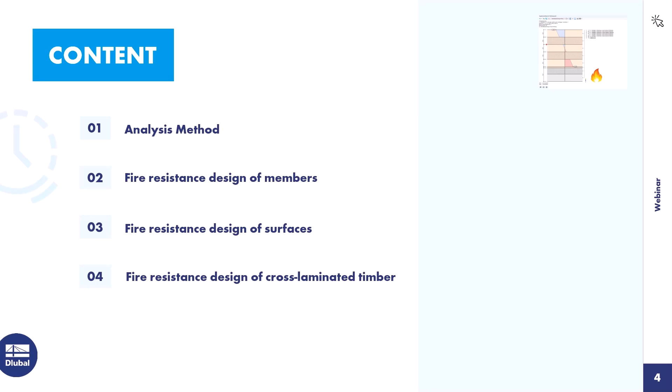We will switch to the program and I will show you the settings directly in the program. But the main focus today is the theory, so that you will understand what is the background of the Eurocode, and how everything works with the charring and with the design afterwards. So we start with theory, then we switch over into the program, we check a few members, we check the design of surfaces, and at the end we will design cross-laminated timber for fire design. Okay.

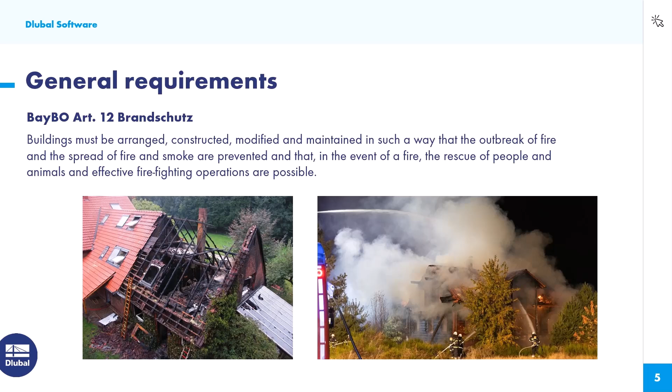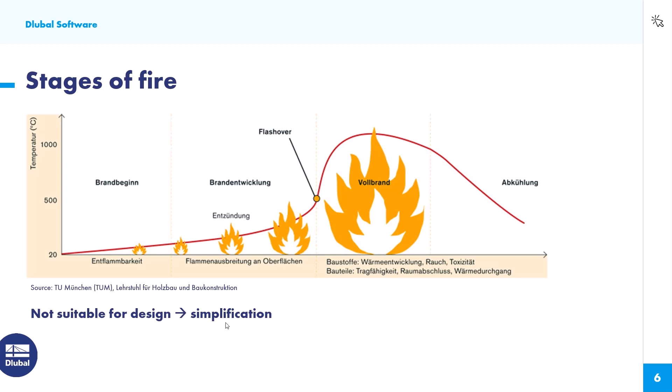Okay, so then we need to talk about stages of fire. The first stage is the non-flaming smoldering before it goes over to the developing fire stage. Then we get the flashover where we receive the fully developed fire before it comes to the decay stage. And of course, when we think about this red curve here, you can imagine that this is hard to simulate in a structural analysis. That's why we need a simplification, and how this simplification looks, you will see in the next slide.

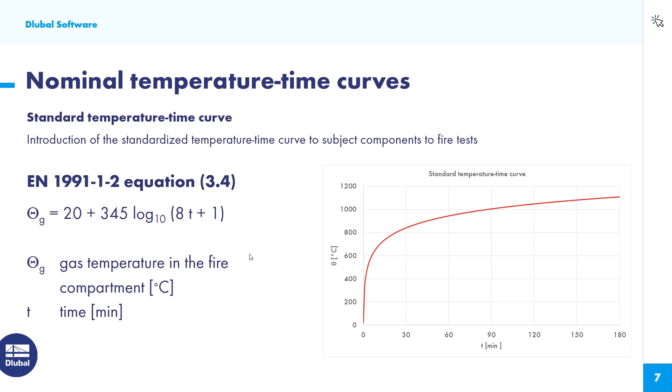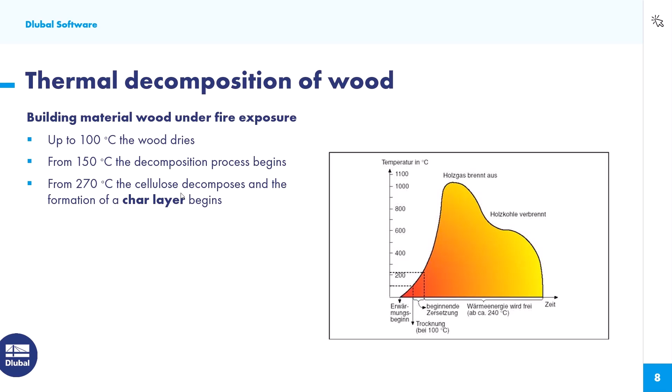Next slide is about thermal decomposition of wood. I guess it's clear to everyone that in the beginning the wood begins to dry. This is up to 100 degrees Celsius. From 150 degrees Celsius, the decomposition process begins. So we are around here. And it has its peak at around 270 degrees Celsius, where the cellulose decomposes and the formation of a char layer begins. And this char layer plays an important role, and it's actually the key for our timber design. That's why it's in bold letters.

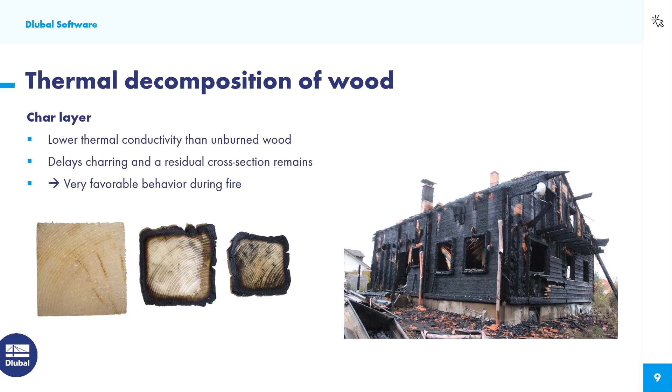In the new Eurocode, this plays a more important role, and we are also focusing on it in the future, but for now we have no integrity. Or we do not prove any integrity, since it is actually not a design check in terms of structural analysis, but as I mentioned, it plays a more important role in the new Eurocode.

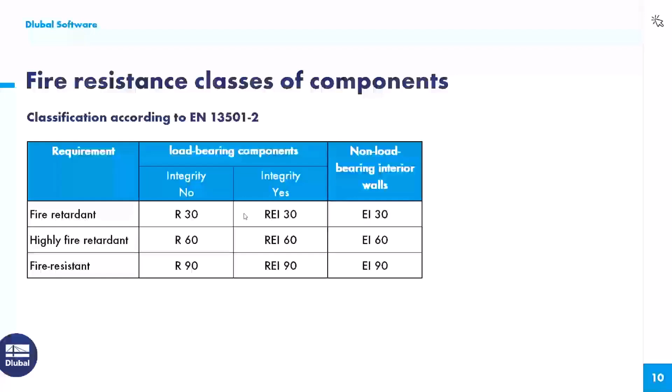Okay, fire retardant, highly fire retardant, fire resistant. I guess that's clear to everyone. We talk about R30, R60, R90, R120, and so on. The indexes here are described on the next slides. I don't want to spend much time here. Please check the video afterwards and pause it. You will be able to read it in detail. Today we're focusing only on the load-bearing capacity.

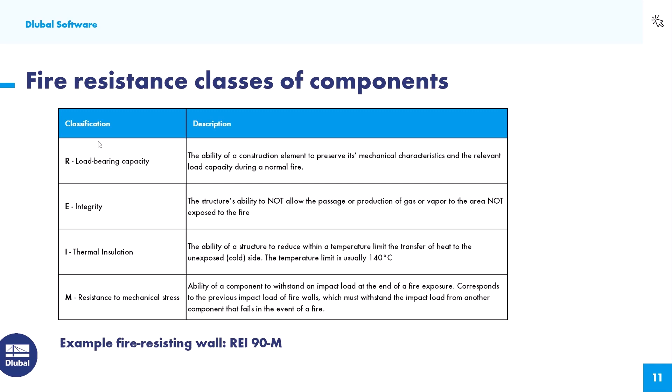Okay, so now let's actually start with the structural analysis part. Combination rules for actions. We need to know which loads we can or have to consider in case of fire design. In this case, we have to look into Eurocode 1, which refers to Eurocode 0, chapter 6.4.3.3. And this is nothing else than the extraordinary design situations.

There's a small error here. Sorry, it should be 'or' and not the German word 'oder'. I'm sorry for that, I forgot to replace it. So it's without any partial safety factors. You see it here, not for the dead load and also not for the variable loads. There's only the question whether you have to use ψ1 or ψ2 for the leading variable action, but this information you should get from the respective national annex of your country.

Okay, there's also this simplification where you use the internal forces or the actions from the normal temperature design multiplied by some factor, and you can design with these internal forces, but I do not recommend using this simplification since it is mostly way too uneconomic. All right.

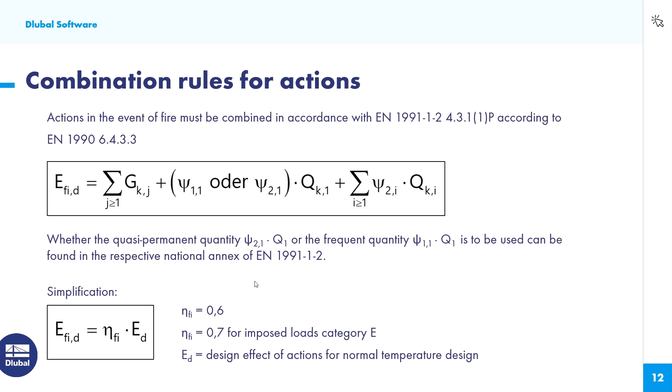The next slide is about strength and stiffness in case of fire. I guess you know these characteristic strengths fk, fmk or fck and so on, ftk. This value is actually the 5% quantile value. In case of fire, we can use the 20% quantile value. That means 20% of the values are lower and 80% of the values are higher than the characteristic values.

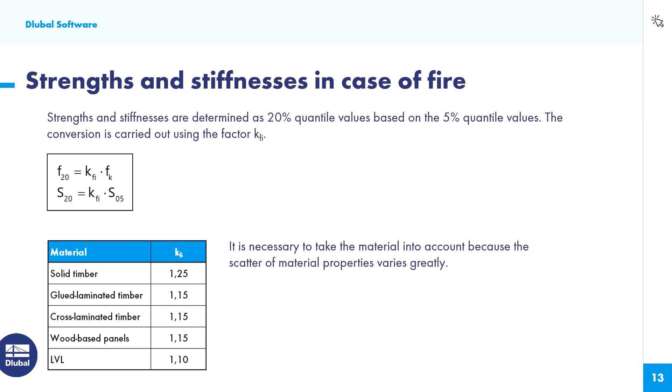Fortunately, there is no additional value in the material standards. They used this conversion factor k_fi, which helps us keep this database as small as possible. And you see the 20% quantile value is dependent on the material. It depends on the scatter of the material properties, because it varies greatly from solid timber to glulam, for example. And I guess it's clear that the properties scatter because of branches, cracks and whatever. Okay, that's it.

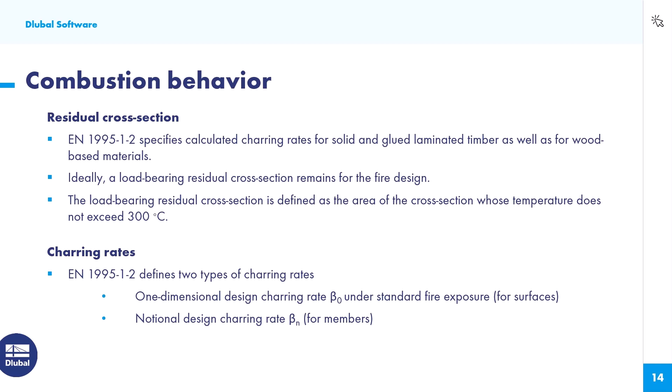Then we need to talk about charring rates. We have two types. We have the one-dimensional charring rate, beta 0, which is used for surfaces in terms of RFEM. And we have the notional design charring rate, beta n, which is actually for members. Let's have a look at table 3.1 according to Eurocode 5. Here you will find the charring rates beta 0 and beta n. For glulam, for example, beta 0 is 0.65 and beta n is 0.7.

All right, the difference here, or actually the ratio, is much higher for solid timber than for glulam. The reason is that solid timber has a much rougher surface, and cracks also play an important role, which is why this ratio is much higher than for glulam. The one-dimensional charring depth can be calculated by multiplying the charring rate by the time. Also for the notional charring rate, we multiply the charring rate beta by the time.

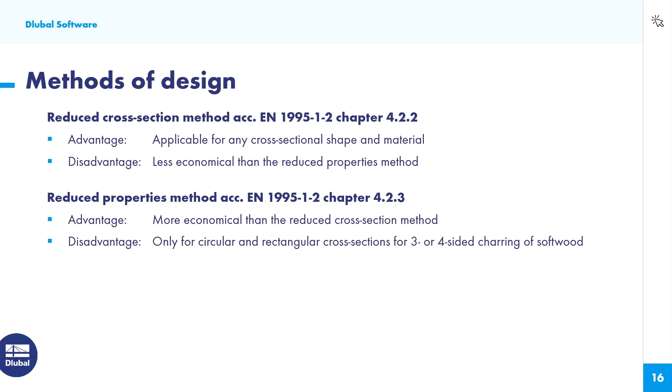softwood as well. Actually, the reduced section method can be used only when we talk about surface design. For example, for CLT, the reduced section method needs to be used. In our program, we consider only the reduced cross-section method, but maybe in the future I'm thinking about also introducing the reduced properties method, since the amount of work is not so high. So I'm thinking about also taking over the reduced properties method for the member design.

Okay, let's have a detailed look at the different design methods. Here we see the reduced cross-section method. We have the initial surface of the member, and it's getting reduced to the residual cross-section by the charring rate multiplied by the time. And since the area between the blue and the yellow line here also has an increased temperature already, and therefore a reduced strength and reduced stiffness, this area should also be neglected.

And that's why, for times higher than 20 minutes, the factor k0 is 1 and d0 is 7 millimeters. So additionally we add 7 millimeters to our charring depth. When we go to the strengths, we have a kmod,fi factor, but do not interchange it with the kmod factor from the cold state design, where we have the kmod factor dependent on the load duration class.

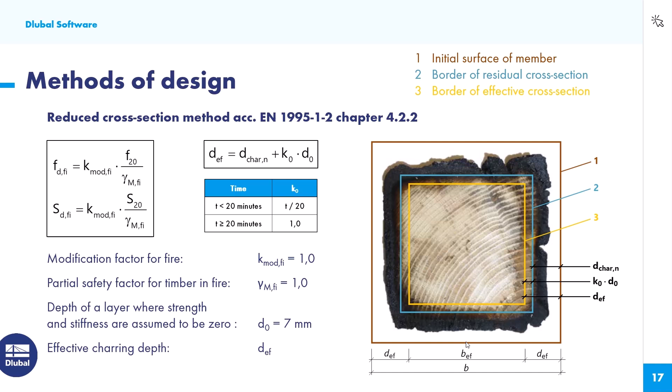The reduced properties method is actually similar. We have the initial surface of the member and the border of the residual cross-section. What we don't have is this additional 7 millimeters, so the yellow line here. That means the effective depth is the charring depth. But we have to consider a kmod factor which is smaller than 1.0. This kmod factor depends on the perimeter of the fire-exposed residual cross-section and the area, and it differs for bending, compression, and tension strengths.

And that's why it maybe makes it a bit harder for us, since we always have to fulfill the global design for all design checks. There is nothing listed for shear, and nothing listed for compression perpendicular to the grain. So maybe we need to find a solution to also introduce this reduced properties method, and I already have ideas for it.

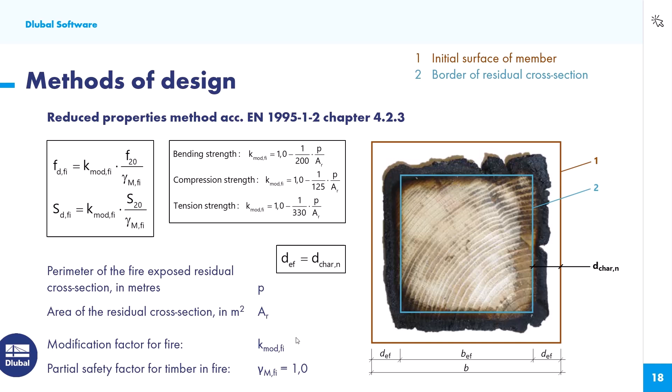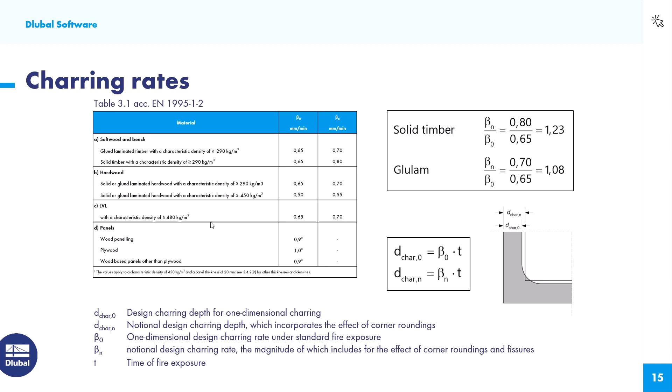Okay, let's do a small example for this ceiling beam, which is softwood C24, 140 by 240 millimeters. The fire resistance period should be R30, and the charring should be on 3 sides: left, right, and the bottom side. So we calculate our charring depth, multiplying the beta n factor from table 3.1. It's this table: solid timber, which is C24, we have 0.8, multiplied by the time. In this case it's R30, meaning 30 minutes.

We get 24 millimeters, and we additionally add 1.0 times 7 millimeters. Then we get an effective charring depth of 31 millimeters. Now we take the 31 millimeters 2 times and reduce the width, and we get 78 millimeters. For the height, 240 millimeters minus 1 times 31 millimeters equals 209 millimeters. Actually, it's really simple. Okay, then let's switch over to RFEM.

I'm sorry, maybe I should... I'm sorry. I have loaded the wrong files.

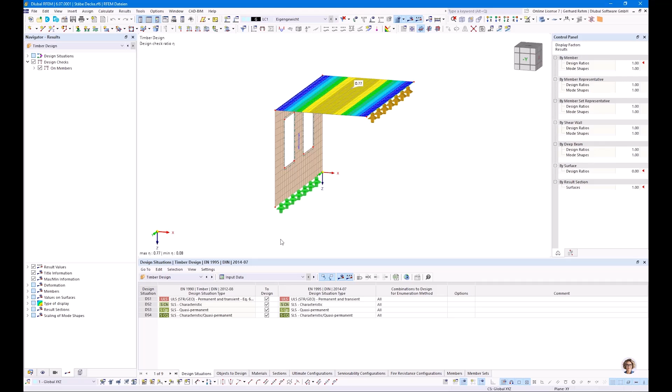Because they were already finished, and of course I want to start directly when our ULS and SLS design is fulfilled. So we see this floor here. I have shown this floor with different variants in another webinar, I guess a year ago or something. You will find this webinar also on our website. And now, of course, I want to extend it for fire design.

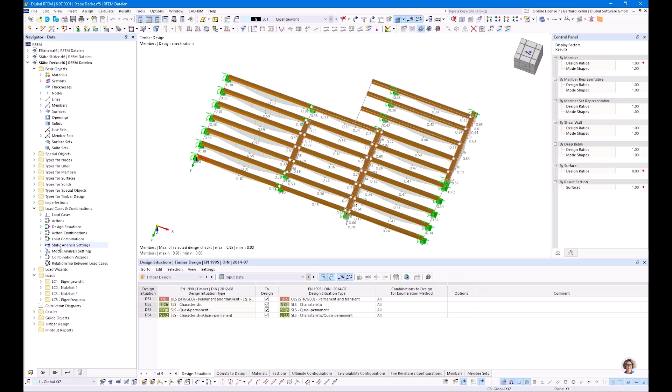And what we will do is we will add an additional design situation, because we need our actions in case of fire. Okay, so I added the design situations here, and I will add another design situation. In this case, I select accidental fire. Watch out, there is also accidental without fire, but this should be used for example for an impact load or something. In case of fire, please use this one here. It depends on the national annex. Since we have only imposed loads and I use the German annex, I will use psi 2 in this case.

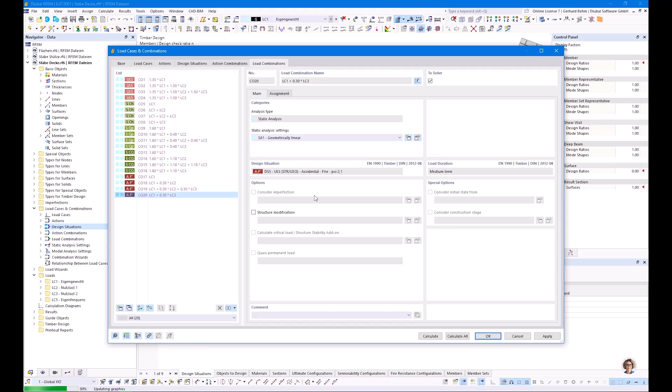Okay, and then we get our load combinations for ULS, cold state, and also the fire state, where we have imposed loads, dead load, and imposed loads on different spans. Of course, timber design results need to be deleted. We want to add fire design here. All right, let's have a look at the floor beams. In this case, fire resistance config was automatically assigned to it. So in case you don't receive any results for fire design, please check if a fire resistance configuration was defined here. Let's have a look at it.

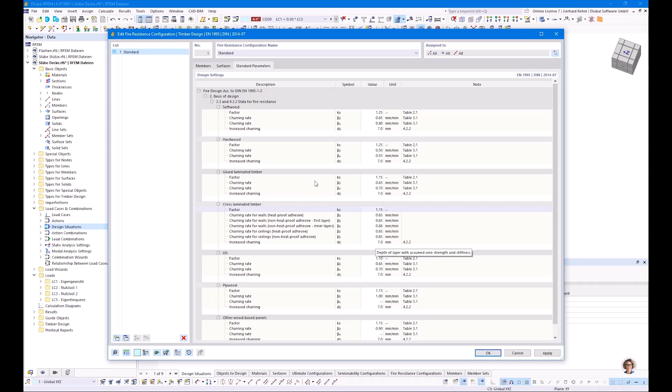Okay, so there are different tabs for members, surfaces, and some standard parameters. So in this case, it's exposed to fire on 3 sides, so not the top side. And we check it against 30 minutes. And when we switch to standard parameters, you will see all these beta factors for different wood and for different timber material. And you are able to change these values in case of some special settings from some special approval or something. Okay, so that's actually it.

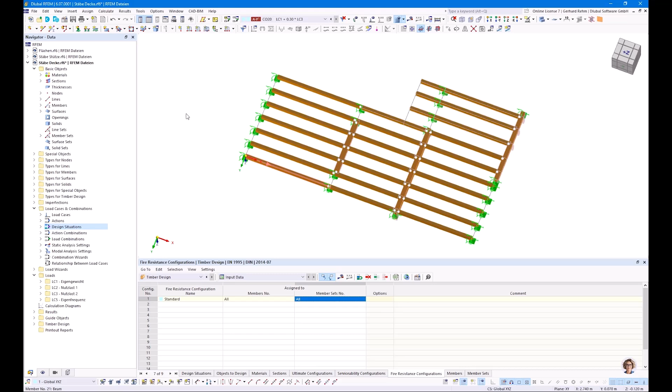So here we can also check which fire resistance config is assigned. So in this case, this config 1 is assigned to all members and all member sets. Of course, if some member has a different setting, you can simply switch it here in this design configuration tab. And here you can also create new configs. Okay, so that's it. I guess for now I will run the analysis.

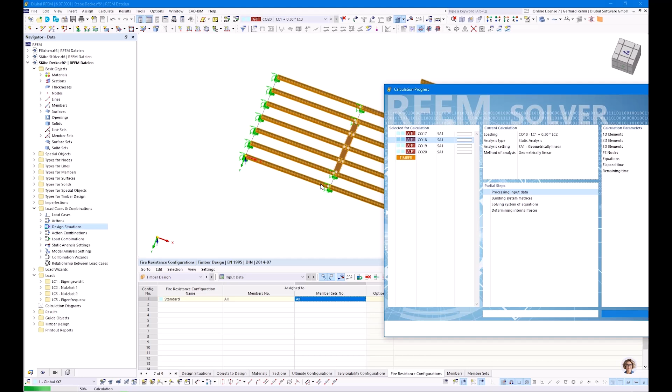And then we will check and compare, because the floor beams here, the ceiling beams, have exactly the same section like my hand calculation. So we had 140 by 240 millimeters. Okay, so let's focus on, it does not matter. We don't take care of the numbers for this example. Let's check this member here, and we check fire resistance. Let's check bending. And let's have a look at it. So it's not so interesting.

We only see how the characteristic value is transferred into the 20% quantile value. So we increase the characteristic strength by factor 1.25. So it's okay. And k mod fire is 1.0, and also the partial safety factor for fire is 1.0. Here we get the information about the fire resistance.

So we have a t required of 30 minutes, and we have beta n of 0.8 millimeters per minute for this material, multiplied by 30 minutes equals 24 millimeters. We add additionally the 7 millimeters, and we get an effective charring depth of 31 millimeters and an effective section of 78 by 209 millimeters, which was exactly the same value as in our example here. Okay.

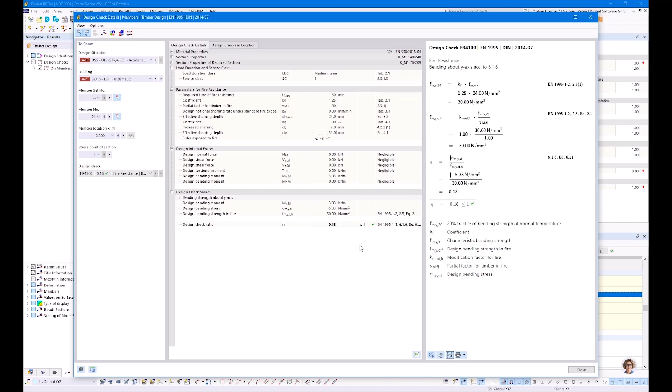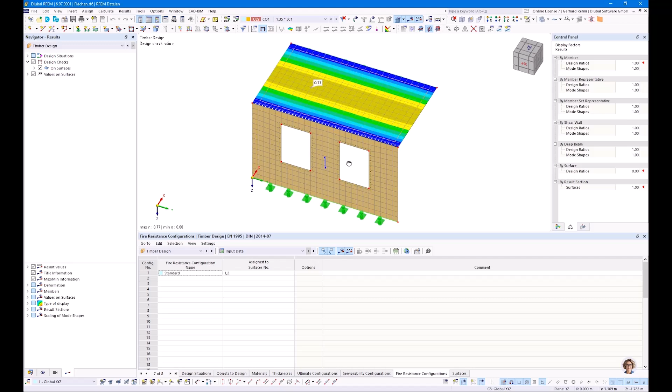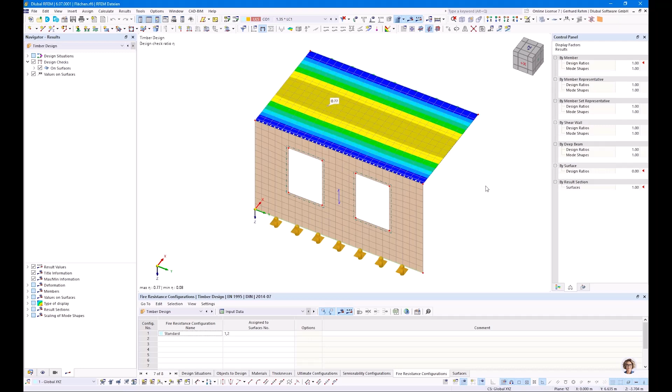Let's go directly to the next example. It was this one with surfaces. So there's a small additional building next to another building, but the other building was not modeled. So that's why I have this fixed support here on this side. There is a line hinge here on this side, and there is a support here on the wall on the bottom side. So this floor here was made of an 80 millimeter glulam floor.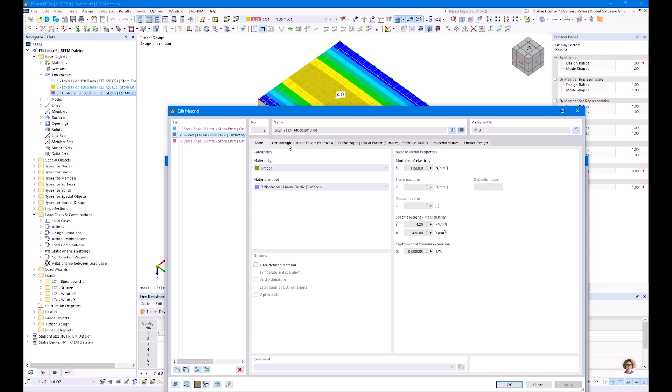So it's an orthotropic material model. So let's have a quick look at it. So I've switched to orthotropic linear elastic surfaces, where we have a different modulus in X and Y direction. Of course, this is made of multiple pieces of glulam. So maybe 80 by 625 millimeters or 620 millimeters or something.

And of course, there should be no moment transfer in Y direction of the surface, but since we span it directly in one direction, there is no big difference. Of course, if there is another support here, then maybe we should think about reducing the stiffness in Y direction or adding some line hinges, but for this example, it's absolutely okay.

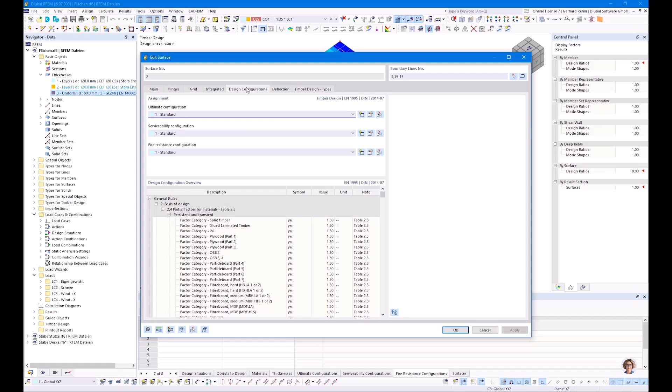Okay, so what I have done here was I have defined some fire config for surfaces. So we check it. Let's check it against 90 minutes. To make an extreme example, you can imagine we have 80 millimeters and we expose it to fire for 90 minutes. Yeah, you can imagine what happens. And we want to have the fire only exposed on the bottom side. So that's all what we enter for now. We come to all other settings later.

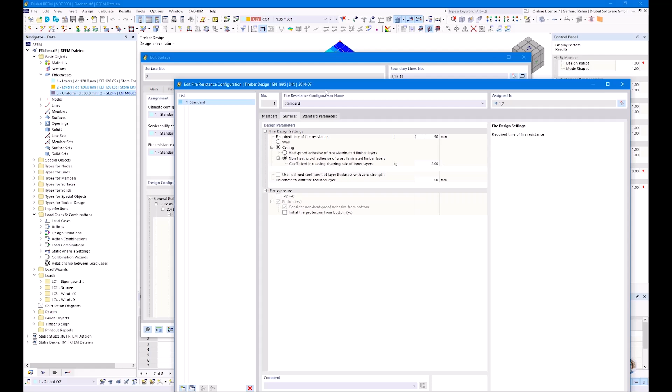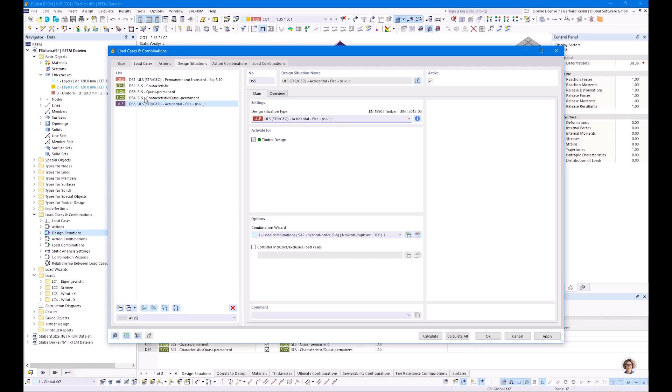Okay. So we need also this design situation. I will add a new one here. So in this case, I select this one because wind is also considered here. So we have dead load, we have snow load and wind load, and we have a really high dead load because I have defined 2.5 kilonewton for load case 1 in this example.

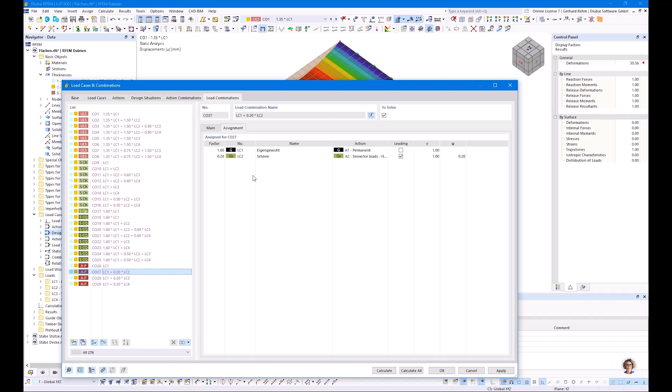Okay, let's check it. Yeah, we have load case 1, load case 2, which is snow, load case 3, which is wind, and load case 4, which is also wind. As I mentioned, for the German annex this load combination can be neglected, but for now I'll leave it. Okay, so that's actually all.

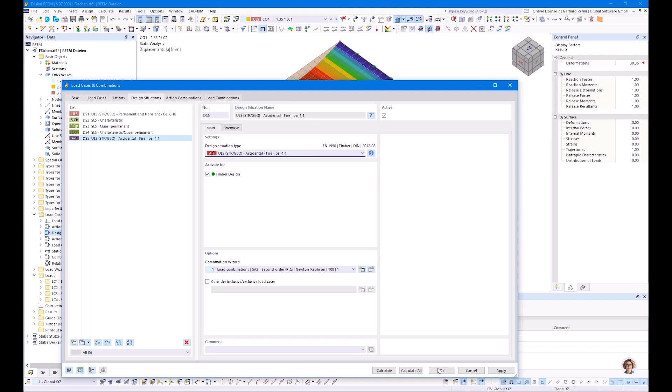Oh, sorry, I forgot to create it. A minute. I hit the cancel button and not the OK button. That's why it was not saved. Yeah, let's use the first one. Okay, that's actually all. We focus only on the floor for now. I start the analysis. And then let's check what happens.

So maybe have a focus on this diagram here. You see already the deformation becomes extremely high. So we are around 1.30 meters, 1.40 meters deformation. And you see there are some errors, but fortunately we get some results.

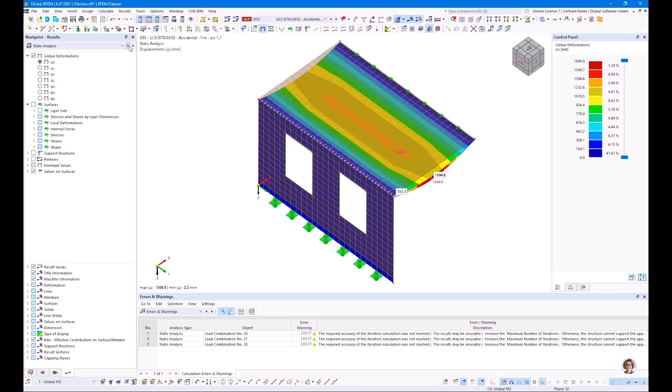But of course, when we check the deformation for this load case, the maximum deformation is 1.70 meters. The span of the floor is only 3 meters, so it's 50% of the span length. And I guess it's clear that no firefighter will enter this room when he sees the floor deform like this. But at least we get results. But watch out, it can happen when you don't take care of it.

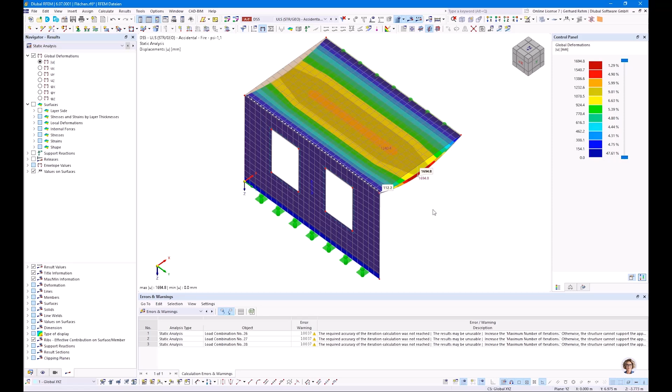Of course, nobody would apply 90 minutes to an 80 millimeter panel. So it can happen that the structure becomes unstable, especially when we talk about p-delta analysis, so second order effects. Then, of course, the critical load factor plays an important role, and the structure becomes unstable under some circumstances. This needs to be considered. Okay, so in this case, it's clear this floor will definitely not work.

And when we check the ratios here, you see directly the ratio is extremely high. Let's check it directly. We have the charring depth calculated here, and the remaining thickness of the surface is 14.5 millimeters. You can enter and see each intermediate value here in this dialog.

But there's also this diagram here on top, or when you close it and click here, let's switch to the stresses, you will see we had the 80 millimeter and the remaining effective thickness is only 14.5 millimeters, which is of course too low. And the charring depth here can be seen as 65.5 millimeters.

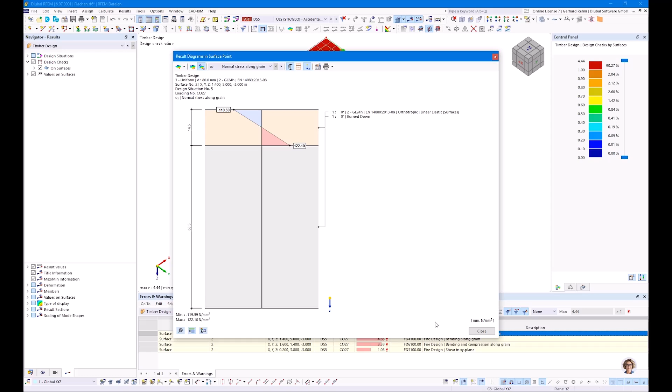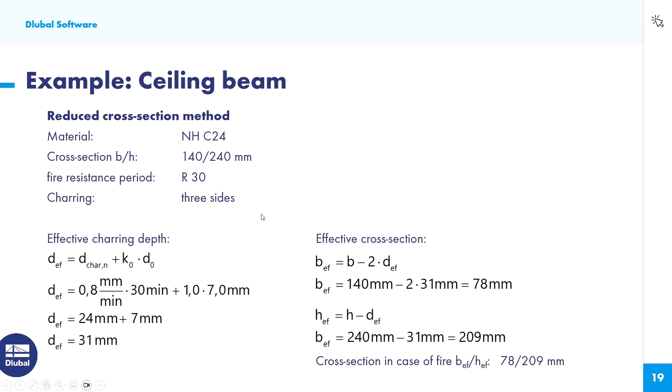And now the question is how we can fix this. Of course, we can increase the thickness of the surface, but there is another way we can consider. So let's go back to our PowerPoint. And now we talk about initially protected components. As you can see, I guess the most common case is to cover it by some gypsum boards.

The advantage in this case is we save time, because the gypsum boards, or all other claddings, cause a delay. So the timber will start to burn much later than without this cladding. Of course, it always depends on whether the timber should be visible or not, that's clear. But in case it's not visible, then we can apply such claddings.

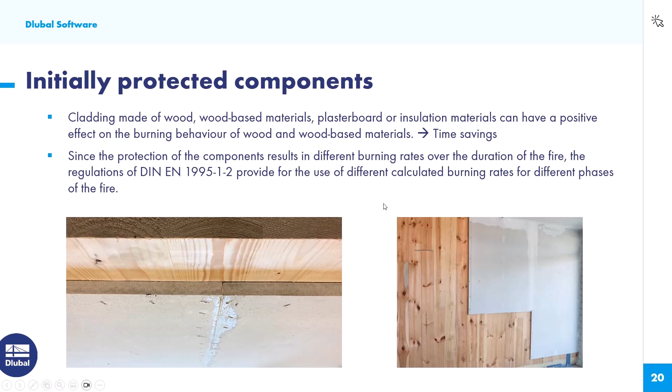The Eurocode describes different stages or phases of fire, and we will have a look at it in detail now. Maybe you have seen similar diagrams like this. Curve 1 is the charring rate for the unprotected surface. So we have a linear charring rate; actually here that's the charring depth. It's nothing else than beta 0 multiplied by the time, and of course it is linear. And the timber starts to burn exactly at t equals 0.

And now we come to this delay, when we use some protection. Here we see two different curves, curve 2 and curve 3. We will talk about both in detail on the next slides. Here the time of the delay of charring due to protection equals the failure time of protection. That means the protection will fall down from the floor, for example, at the same time the fire starts on the timber.

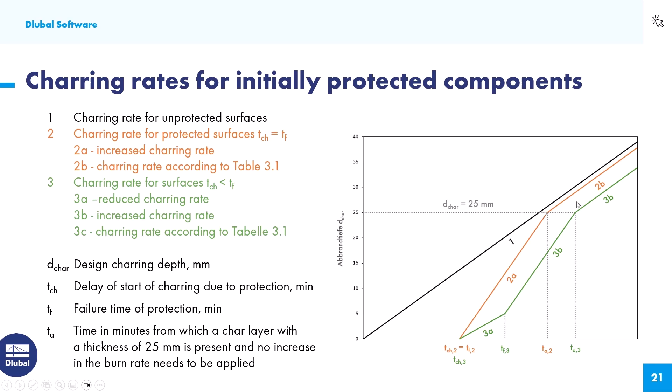And after the protection is gone, we will have some increased charring rate again. You see here we have this 25 millimeters limit, and after this 25 millimeters the normal charring rate will continue. And that's the time TA, and this time is actually the time in minutes from which a char layer with a thickness of 25 millimeters is present, and no increase in the burn rate needs to be applied anymore. Okay, let's have a look on it in detail.

Okay, so for wood-based panels, gypsum plasterboards type A and H, we can use this curve number 2, where the charring equals the failing time of the protection. For wood, it's simple. We can simply divide the panel thickness by the charring rate, and then we know the time. For the, I guess, most common case using gypsum plasterboards, we have equations in the Eurocode for fill joints or gaps smaller than 2 millimeters, or for gaps higher than 2 millimeters.

So for a typical 12.5 millimeter plasterboard, the charring time here is 21 minutes. So the delay, the fire will start 20 minutes later. But as you can see here, we have an increased charring rate afterwards. So at the end, I guess this was, I'm not sure, it was 60 minutes. At the end, with this time, we don't save much time, because here we can consider a linear curve, and here it's bilinear. So we have an increased charring rate here.

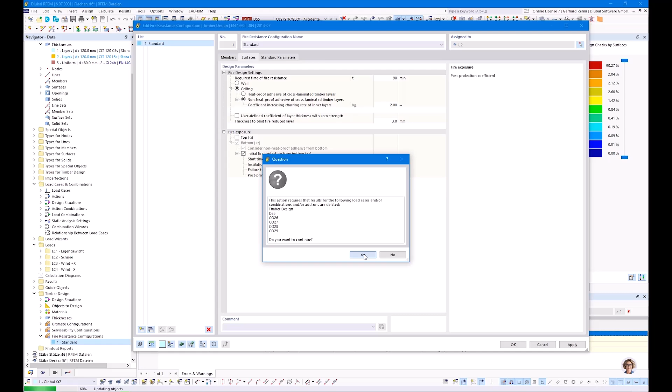In this case, let's start with tf equal tch, and this increasing factor K3 should be considered with 2.0. So, okay, we need to recalculate everything. As you saw, also the internal forces and the results from the load combination for the accidental actions got deleted because we sent the reduced section to the solver. So all the stiffness is considered with a reduced stiffness for surfaces.

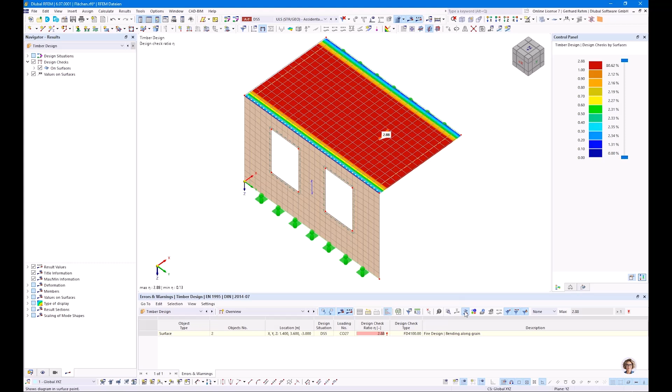Okay, when we run the analysis again, before we had an effective section of 14.5 or 14.8 millimeter. Deformation was at 1.69 meters. Now we get a deformation of around 1.30 meters or 1 meter or something, a ratio of 280%, of course, still too high. Let's check the thickness. Okay, we won 1 or 1.5 millimeters, so not really much.

Okay, let's go here to surfaces again, and maybe let's try the value from ÖNORM or from the global Eurocode. Let's switch to 31.5 minutes. But sorry, my mistake. It was for the walls. In this case, we should consider here the floor. In this case, maybe better to use two-layered. So this is this cell here. It's 1.4 multiplied by 2 by 12.5 millimeters plus 4. Becomes 39 minutes. Okay, so maybe better directly to use 39 minutes here.

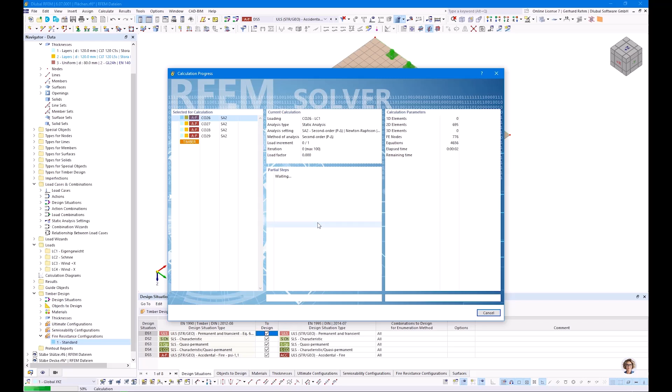And then let's see how far we can go, and maybe we come close to the 100% ratio. Okay, the deformation is at 30 centimeters, which is not too bad in case of fire, and the ratio is close to 100%, so it's 1.31. Since we have already 2 layers of gypsum board on it, maybe it's worth to think about increasing the thickness of timber. In this case, I'm nearly sure an increase of 100 millimeter will be enough in this example. But okay, that's okay for now.

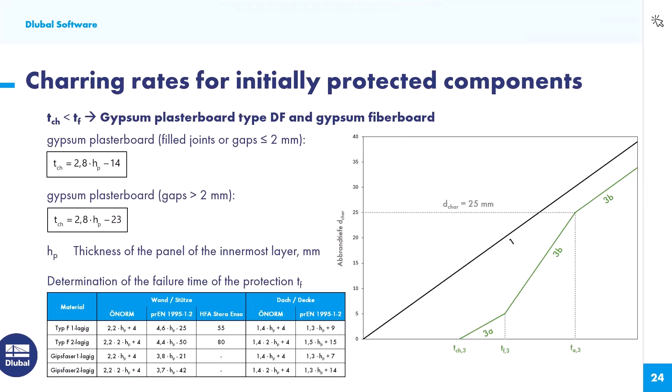Time is running quick. Maybe switch over directly to the slides and have a look on CLT, which has some special rules. Before I start with CLT, as you know, it's not directly regulated in the global Eurocode, in the current Eurocode. It is covered in a few annexes like the German and the Austrian one, but this timber design is not part of any annex. So this is actually the current state of the technique, and it will be also part of the new Eurocode, and it is also already in some approvals from producers. So for example, Stora Enso, they use this approach, and also a few others.

Okay, so first we talk about linear charring. That's nothing else than our solid timber. So same rules. The only additional rule is for CLT and linear charring, layers smaller than 3 millimeters should not be considered anymore in the design, because the charring is of course not perfectly symmetric over the whole surface, and that's why it's better to neglect layer thicknesses smaller than 3 millimeters. And the linear charring can be used only for heat-proof adhesive.

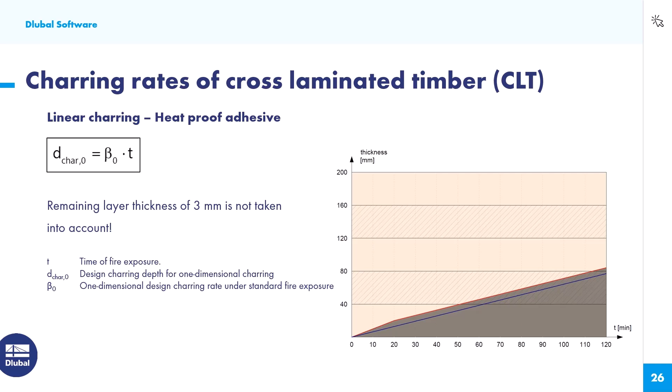Mostly this is not the case for CLT, so I don't know any producer. Maybe there are producers which use heat-proof adhesive, but it is more common to use non-heat-proof adhesive, like the polyurethane adhesives. In this case, we need to consider a non-linear charring, because the temperature influence on adhesive causes delamination. Yeah.

Let's have a look on this image here. You will see this is a CLT floor. You see the longitudinal layers and the transversal layers here. And you see this char layer, which helps us actually to reduce the fire, is completely gone within a second. It is there, then it falls down, and then there is no protection. And the temperature in the timber is really high. It's really dry, and you can imagine there is additional increase in charring rate.

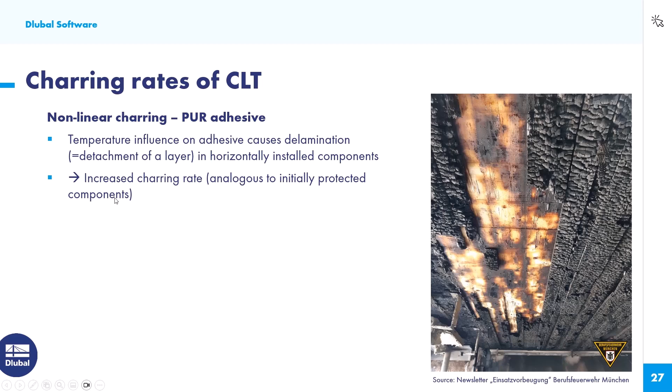Yeah, similar actually to the initial protected components. There we use the same approach, and you will see on the next slide. This is this stair model, sometimes called, where we have different areas as well. So the first area is here, A. Here we consider a normal charring rate with beta 0. Most approvals use 0.65 millimeters per minute, but other approvals, maybe they use 0.7. It depends always on the approvals.

So the first area is 0.65 millimeters per minute, for example. And then we come to the second layer. So let's assume the layer falls down. The timber behind is already threatened with a high temperature. That means we get an additional increased charring rate. In this case, we call it k3. So it's also factor 2, similar to the initial.

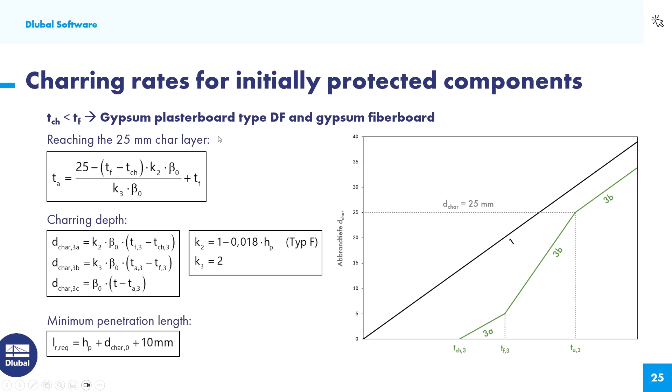Let's switch to this slide, to these initially protected components. And here we go. When the char layer actually reaches 25 millimeters, we can continue with the normal charring rate, and then it starts from scratch. So from here again, and so on.

But of course, this is 120 millimeters, and you see for 0.65 millimeters we get an effective charring depth of around, let's say, 110 millimeters or something. Let's have a look at it in detail afterward. Also, the 3 millimeters should not be taken into account. And this is for roofs and ceilings.

For walls, of course, gravity plays an important role, when it falls to the side, for example. Here we also have a bilinear curve, but we do not have such a high increased charring rate. So the first layer will be burned by 0.65 millimeters per minute, for example, and the second and all following layers get a charring rate of 0.86 millimeters per minute.

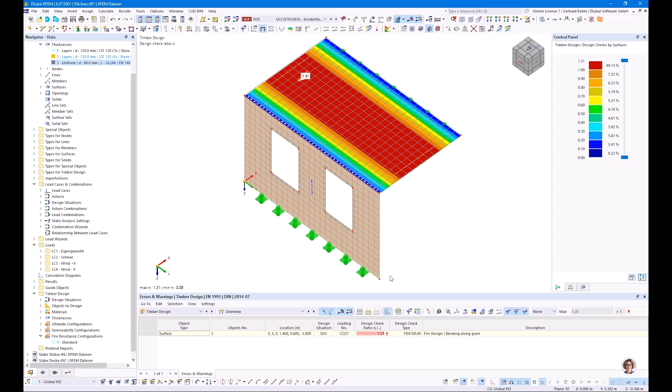In a few approvals and also in literature, this value is recommended. Also, 3 millimeters should not be taken into account. Let's have a look into the program again. I will replace this layer by layer number 2, which I have prepared already. It's a 5-layered Stora Enso composition with 30, 20, 20, 20, 30 millimeters.

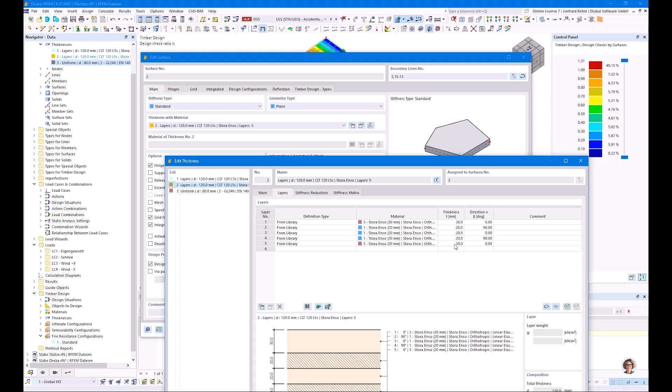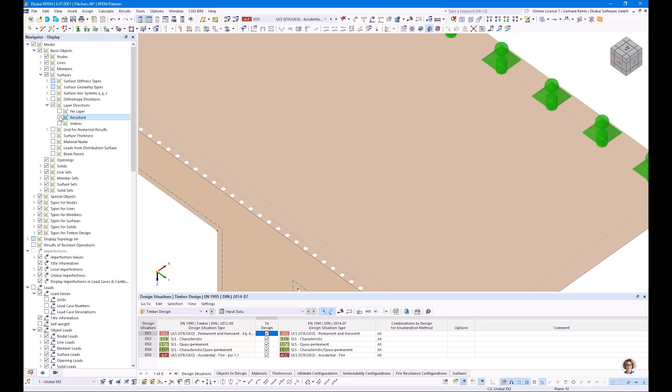The span direction can be checked here with these blue arrows. You will find them in the display navigator, surfaces, layer direction, and I display the resultant. Of course, you are also able to add per layer with indices, and then you will see the layer direction directly. But for this example, I prefer to see the resultant stiffness direction.

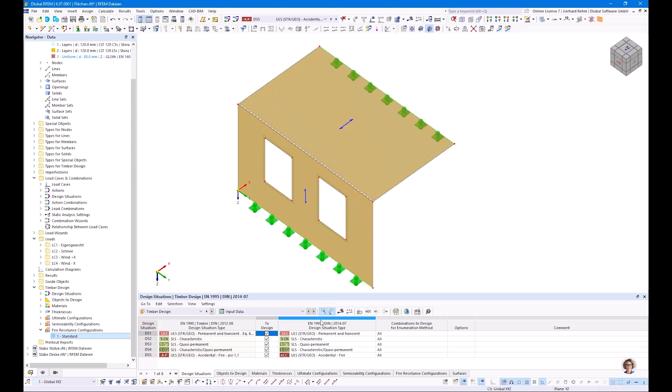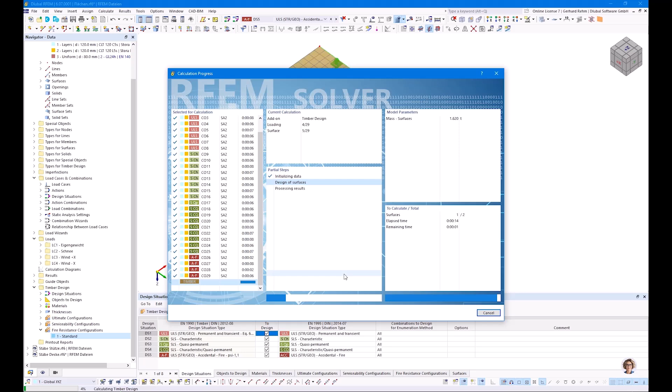Okay, let's leave the settings like we had before and run the analysis again, and see the differences between the CLT and the softwood or solid timber. Okay, deformation was not really high, it was around 120 millimeters. Let's have a look at the ratios.

Let's check the ratios higher than 20%, and we get a smarter overview: ULS design is 20%, SLS around 31%, and fire design will control in this case with a ratio of 79%. Let's look at it in detail. We check the charring depths and get the information directly. Layer number 5 fails, number 4 fails, layer number 3 fails, and layer number 2 will be reduced to 12.6 millimeters.

Of course, it's much easier and nicer to see the effective section here in this dialog. Maybe we switch to stresses again. You will see 77.4 millimeters will fail, 30 millimeters on top will remain, and on the second layer 12.6 millimeters will remain. But since this is the transversal layer, it is not able to support the first layer. That's why the stresses are only considered on the top layer. This helps us a lot to understand the effective section.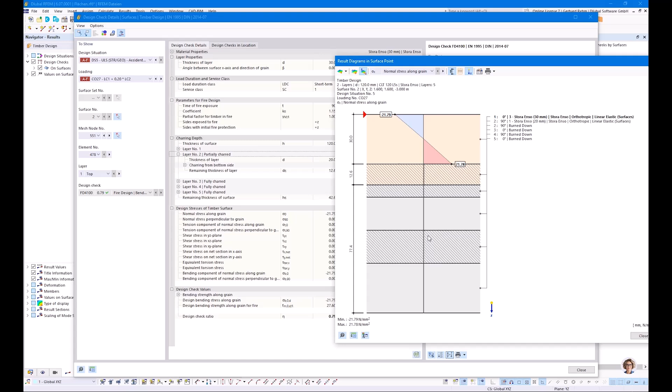But of course, I agree, checking the charring rate inside the tables is sometimes a bit tricky. You can check each intermediate value, but it would be much smarter to see it graphically. That's why we are introducing, finished in a few weeks, this time course monitor, where you can see the charring depth over time. This helps you a lot to understand and compare it with my slides in the PowerPoint presentation.

So for example, here on the right side, that's a floor, and we see the border of the residual cross section, and we add the 7 millimeters here, covered by this red line. We have a protection, you can see, because the burning starts at 21 minutes in this example. And then we have the double charring rate.

Then we reach the 25 millimeter limit and have the normal charring rate again. Then from the beginning, double charring rate until we reach 40 plus 25 equals 65 millimeters, and then we continue with the normal one again. On the left side, we see a wall. On this side, it's not covered with the protection.

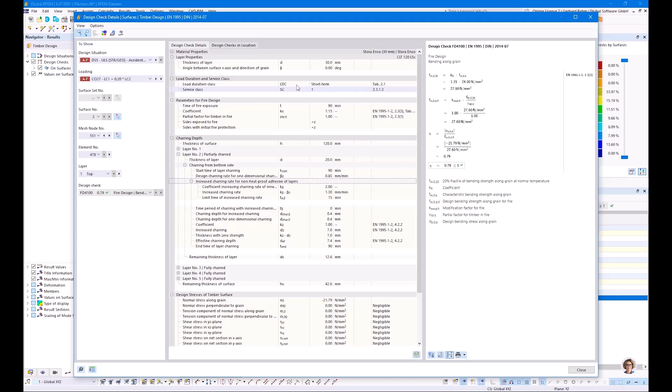rate. On the bottom side, we see a protection, and here it's the same. We start with the increased charring rate until we reach the first or the second layer, and then we continue with this 0.86 millimeter or whatever you have defined in the fire design config. So here you will see for cross-laminated timber, dependent on if you have heat-proof adhesive or non-heat-proof.

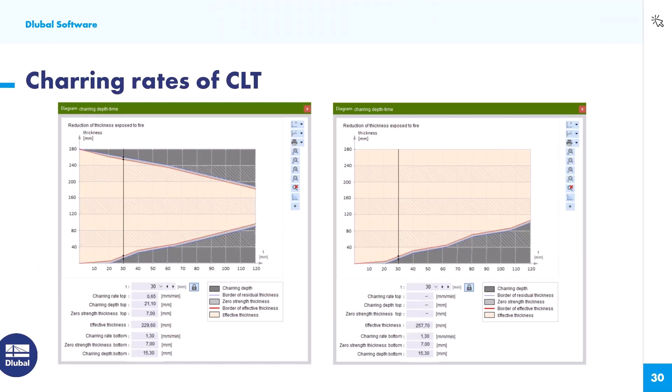Oh, I forgot to show you. Here in this surface dialog, you will find the distinction between wall and ceiling. When you select ceiling, then this approach here will be used. And when you select wall, this approach will be used. Of course, the program does not know if this is a wall or a floor. This needs to be a user input. And dependent on the setting here, you will get this.

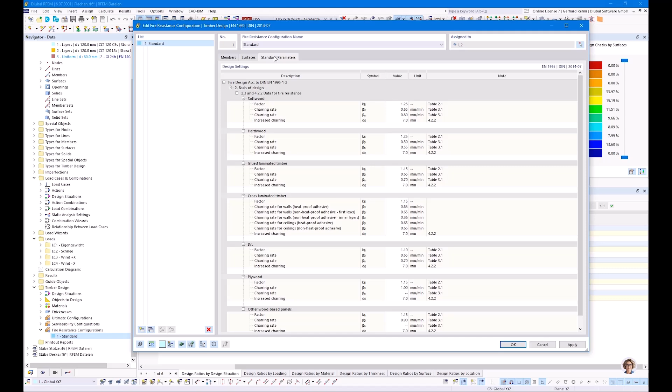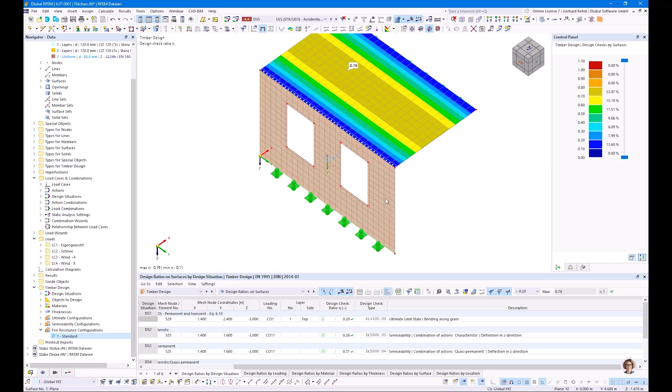Time is already over, but I will show you the wall configuration. So you need to create a new fire config. So I create a new one. For surfaces, you can switch over to wall in this case. Define your required time and your settings. If it's exposed on top or bottom side, top is always -z direction and bottom is always +z direction. So when you right click on the surface, you can activate the local axis systems here, and then you see plus is in plus direction and minus is in minus direction.

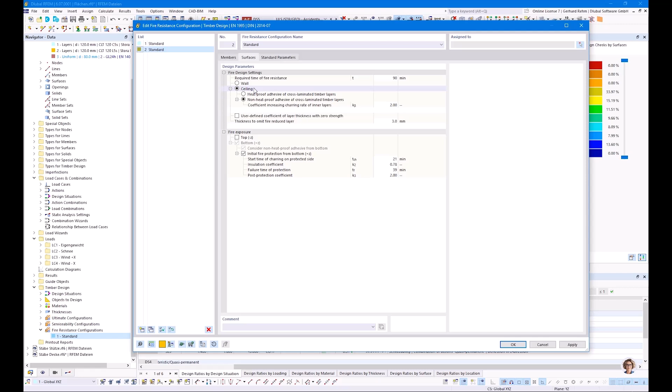And don't forget to, wait a minute, I forgot it. I will switch over to wall, or maybe I don't want to create a new one. I want to create a copy, and I will switch to wall. Okay, and now I have assigned the wall config to my wall. Okay, so for now, that's it from my side.

I'm thinking about doing another webinar on this, especially when we talk about wall design, especially buckling design of CLT. We had already a webinar about buckling design of CLT in RFEM 5, which can be carried over actually to RFEM 6, but maybe in the future I plan to do a webinar where I show also the eccentric effects and the buckling effects on these walls, for example.

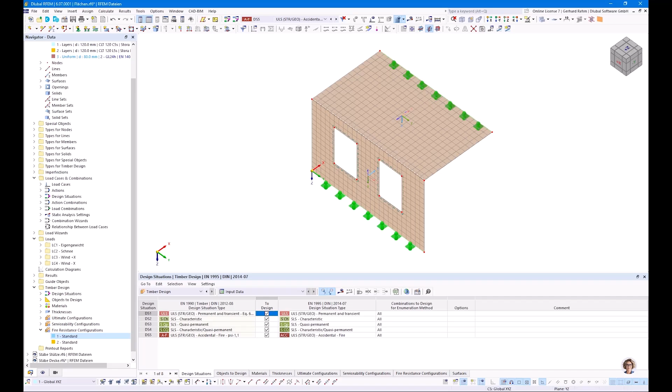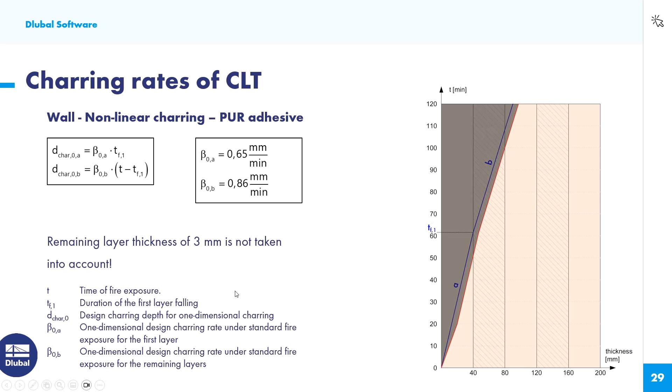So as you saw, it was really focused on this PowerPoint, but I was focused on all this information to provide also to following users to watch the webinars and to learn about this fire resistance. This helps the user, of course, 24/7, and this helps us in the hotline where we don't have to answer the questions because you can check it out in this webinar. And hopefully I fulfilled your expectations, and that's it for now. Hopefully I did not forget anything.

Oh, maybe some words on literature recommendations. Unfortunately, I'm not familiar with English literature, so I know only the German ones because the German ones are already really good. I'm sure there is English literature, but I have no clue about it. Maybe you can send me some English literature sources, and then I can add them to this PowerPoint later.